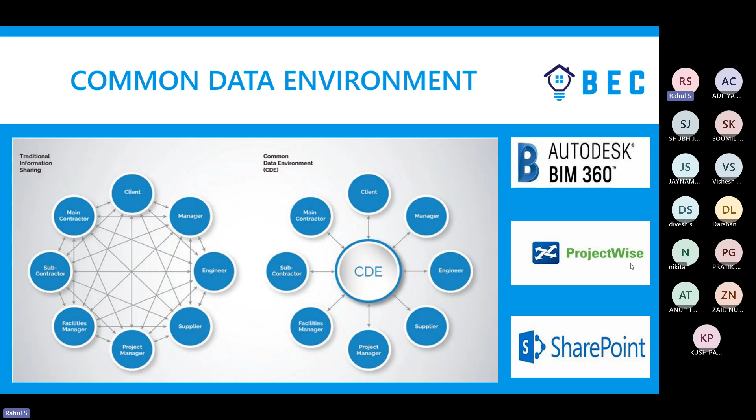Now coming to the next point, we have a concept in BIM called BIM dimensions. Now what exactly are BIM dimensions? Everybody knows or is well aware about 2D and 3D. 2D means we are dealing with only x and y axis, then we shift to 3D. So whatever things we create in 2D, if you want to visualize inside a 3D environment, the z-axis comes into the picture, and you can visualize any model, geometry, or object in 3D mode or 3D visualization.

But when we focus on BIM, or advanced technologies like BIM, we have certain additional dimensions to be visualized or monitored for a particular project, or for any particular object or product - how things will happen with respect to execution, cost, performance, everything. Related to this, we have 4D, 5D, 6D, 7D, and 8D. Till now in India we are majorly working up to 7D itself. 8D and 9D are still under review, not yet published for public use. Some US and British consultants have good experience and are doing R&D in this field, developing things with respect to 8D and 9D.

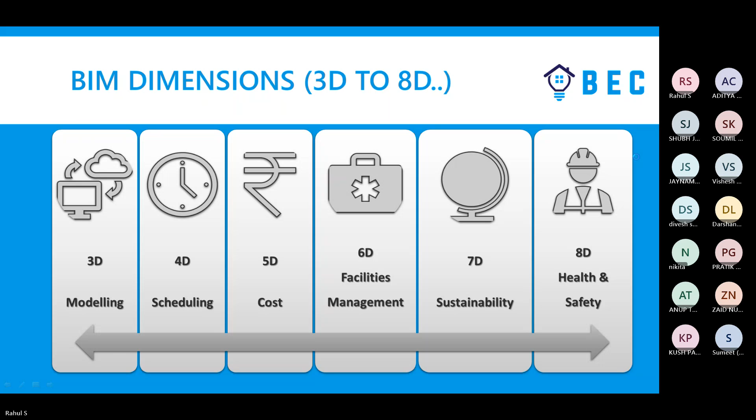Similarly we have facility management, then sustainability and health and safety management. Here we have this 3D shared information, a 3D rich model which will have all the services - architecture, structure, then MEPF. In MEPF also we have multiple things available, like plumbing part separate, electrical separate, sprinkler separate, and HVAC ducting separate.

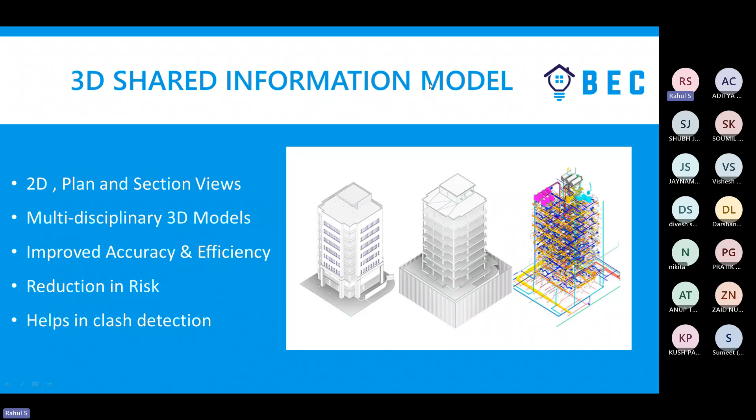Okay, now just a minute.

So what exactly is clash detection? While performing 4D simulations, we need to do clash detection as well, before the 4D simulations, on whatever model you have received. So last time I told you we have three particular vendors or suppliers - architecture is separate, structure is separate, MEPF is separate. When they all submit the model to the BIM consultant or BIM coordinator who is part of the project, his roles and responsibilities are to first QC the model, then review all the models and check whether the data has been created as per standard, and third, he needs to check the clashes.

So what exactly does clash mean, or what exactly is clash detection? Let's say the MEPF duct is clashing with any architecture element or any structural element while performing the planning activity. So those things basically come under clash detection, and we need to check whether your model is clash free or not.

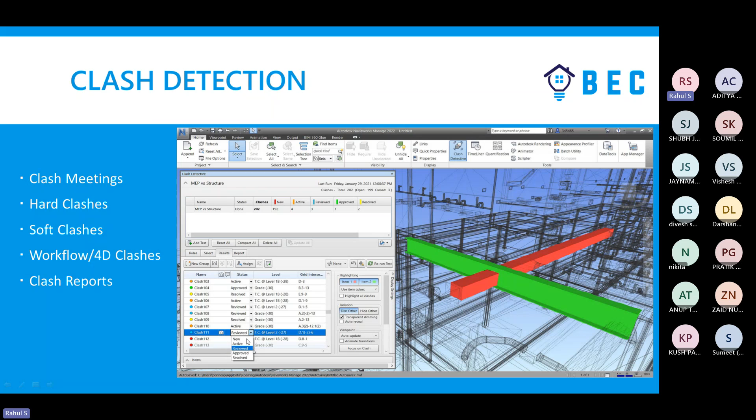So how are we checking those things? We have a small video, I'll just show you. Okay, I think it's not running. I'll just show you here.

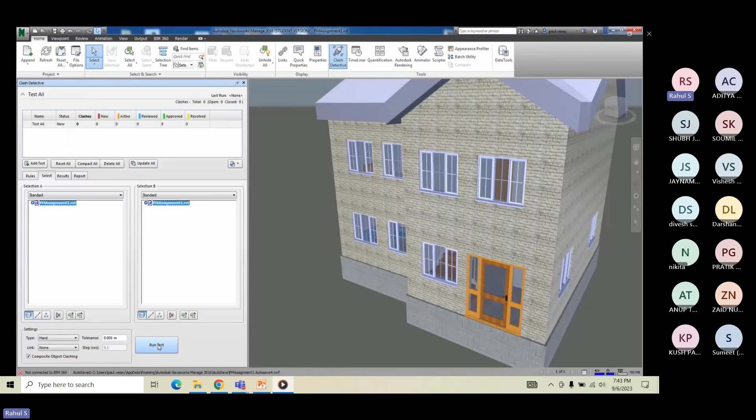So here, once you've imported the model, you need to select what versus what to run the collision check. Let's say I've selected the architecture model versus the MEPF model. You can see whenever you click on particular things, it directly shows some of the clashes. So here it has run the clash check with respect to architecture and structure elements - a few beams or things are clashing with the floor element, and it will be highlighted in red and green color.

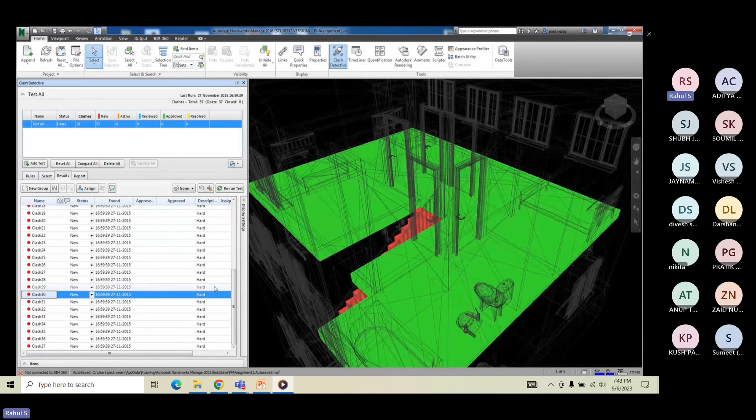So this is how you can generate the collision check, or the clash check, for the model. Once you find multiple clashes, the BIM coordinator or BIM consultant's responsibility is to conduct a coordination meeting and address those issues or collisions to the project team members - the management, the suppliers, those who actually work on this. In this meeting, he or she needs to give guidelines to the project team members or suppliers on or before the particular due date, so they update those things.

So at certain intervals, those coordination meetings will keep happening - maybe every 2 to 3 months - until your model is done and completely clash free. Then the model is approved for construction, or approved for GFC drawings, whatever drawings we issue from the BIM models. Only after that do we issue the GFC drawings.

So this is the complete process we need to understand - how exactly things work from 3D to 4D. First we work on the 3D model, then we go for clash detection. Once your clash-free model has been submitted, your next steps start, like understanding or estimating the costing part further.

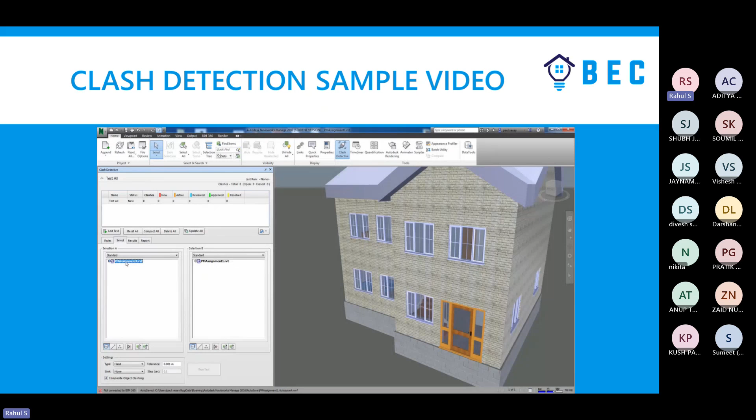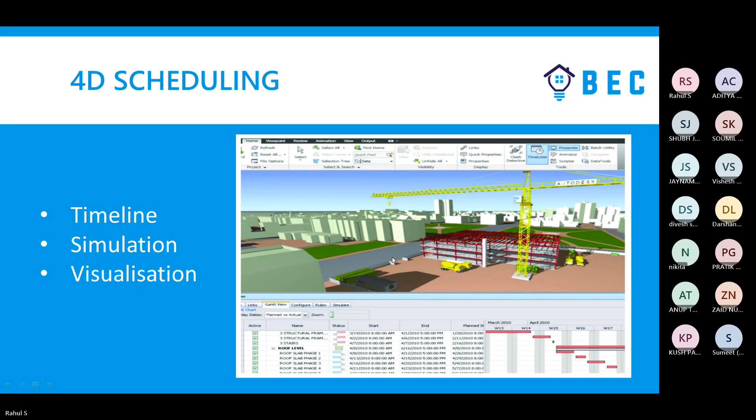So when we run this particular simulation video, it will run with respect to cost, material - everything in detail. I'll just show you that video as well, how it looks.

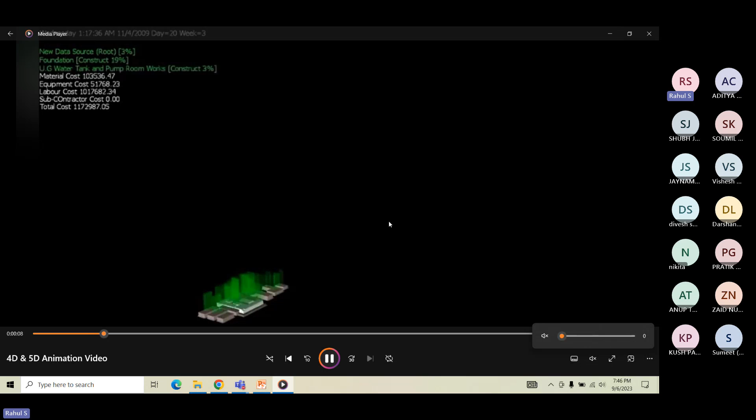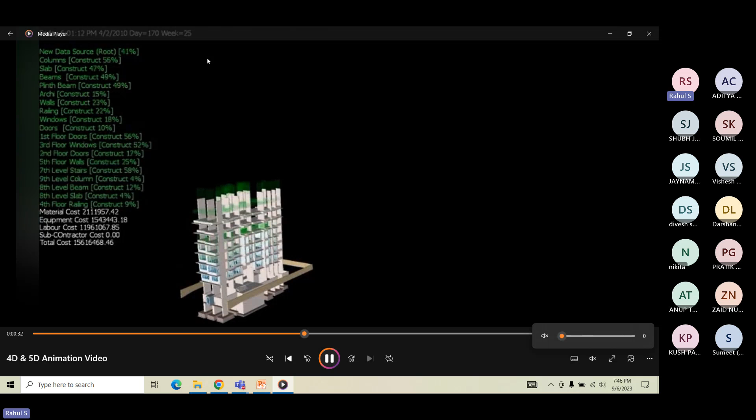So once you assign everything with respect to the date on the top side, you can see how much material cost I'm spending, how much equipment cost, how much labor cost, total cost, subcontractor cost. Only thing is you cannot see the day and time because of this - if you see on the top end, how much week, how many days - I'm not able to, is it visible, the top line?

Can you pause it so people can see?

Is it visible, Vishwesh? Yeah, it's visible on the top bar. Exactly. So here it will give you the date, current date, time, and how many days. So for executing this particular building up to this stage, it has taken 170 days, 25 weeks, and up to this how much cost they have spent.

You can see the floor wise as well. So for doors, this much cost has been spent. 10% of the doors have been constructed, and the cost has been spent for this material cost. You can see here.

If you want to segregate this cost, how much cost you spend for doors, walls, that is also possible. In that case, we generally call it BOQs. We are extracting that particular data from your Revit model, so that you will get it into Excel format, and you can link that data either in a simulation video, or you can prepare dashboards to showcase to your management, like this much cost I have spent for this many items or this many details.

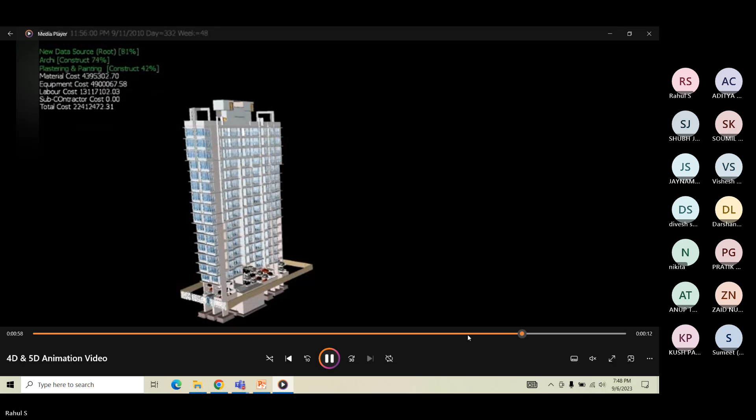Okay, and now coming to the 5D part, if you see, here you will get each and every item with respect to the cost, unit cost, total cost, everything.

So for cost also, we may have multiple softwares, or multiple things to do. Only the thing is the proper software and what exactly you are doing. Most of the people, they are creating the models inside Revit, but they are not using Navisworks. They may have multiple items similar to Navisworks according to their industry standard or their industry use.

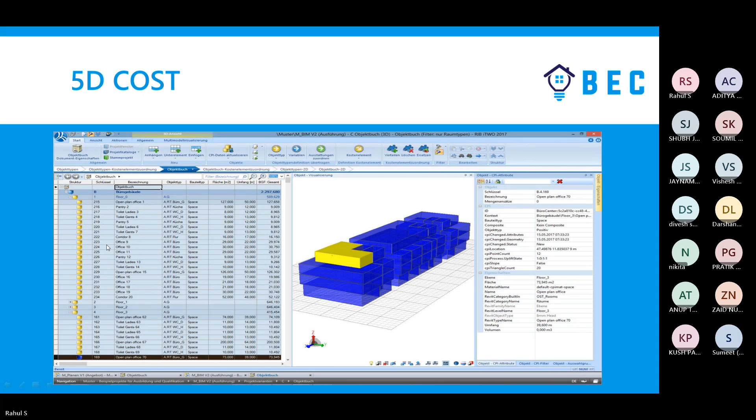Okay, now what exactly are the 6D and 7D parts? So once your model is prepared and ready, and almost your building is also constructed, if you want to analyze how your building will perform after construction. Now what exactly do we need to understand by building analysis?

It may be a daylight analysis. It may be your energy analysis. It may be your building performance with respect to situations, like how your building will perform in summer, how it will perform in winter or in the rainy season. So based on multiple parameters, this building analysis will be done inside Revit itself with respect to one add-in tool, and that is Revit Insight. If you search Revit Insight, it will give you the result of how they are performing the building analysis.

I'll give you one small example. Say I want to perform or understand the daylight analysis. Once my model is ready or once my construction is completed, then if I want to analyze with respect to my wall window ratio, how much energy saving I'm doing with respect to floor wise or with respect to the entire building.

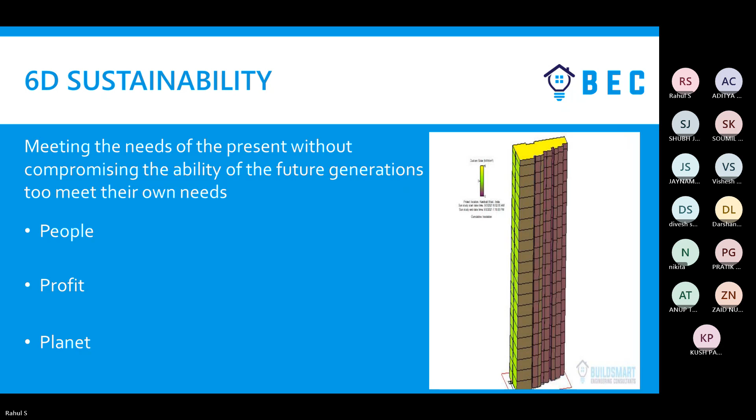So likewise, we need to understand the concept of sustainability and facility management. This is again important data we require for facility management. Now let me tell you why we need this data. When we are preparing the model, inside the model we are placing the assets.

Asset means the electrical devices, CCTV cameras, AHUs, all the electrical or mechanical equipment. When we purchase those mechanical equipments, we are not keeping records anywhere. Let's say I purchase 10 cameras from a company. He gives me 10 cameras, but I don't have anything properly documented. He just gives me the invoice and an Excel sheet with the serial numbers and some detail information. So in the traditional way, we usually keep this everything in the laptop. We install on site and check all those cameras are working fine on one of the CCTV screens or a big screen. That's it. We are not linking the data inside the model.

But when it comes to facility management, or the 7D part, we are generating all the data inside the model itself. For that data we specifically call it COBie data. What exactly is COBie? Construction Operation Building Information Exchange. So whatever building you're constructing, to operate that building you basically need the data.

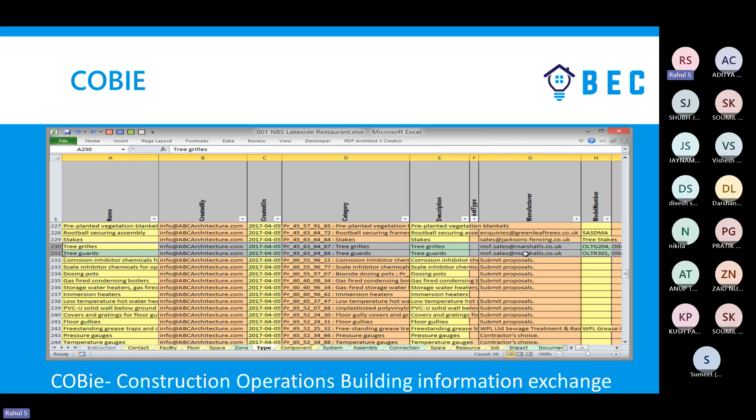So we already discussed facility management and in which domains it may work. It's not related only to our industry, it may be used for multiple industries, for everything, not just buildings. If you see landscaping, in gardening also you can provide some facility management or automation to provide water for the trees. That is also possible.

Okay, and this is about health and safety. So whatever the things so far, BS standard has released with respect to 8D is basically they are developing some standard to maintain the safety policies, or to maintain that particular culture on site.

So what are the provisions that can be taken care of? With respect to safety points, the particular safety engineer needs to fill the daily logs inside the cloud management to submit his or her report on daily basis. Right now, the person comes on site, fills something into Excel, then second day sends that Excel, and no photos get captured. So if you have any CDE platform, you can actually directly capture the photo, and automatically it will get uploaded with respect to the building or the particular person.

So those kinds of advancements will be available inside this CDE, and all the dimensions we discussed so far will be linked to the cloud model.

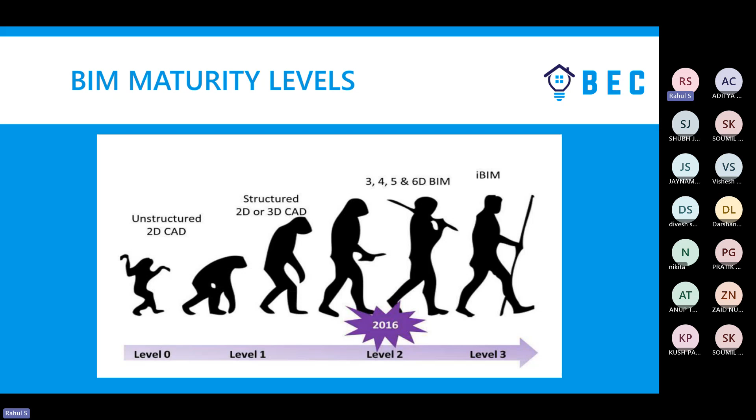And with respect to this, if you see the levels here - now if you see, we compared level with respect to the dimensions, and on this screen with respect to collaboration. In CAD, we are not collaborating with anyone, only one person is individually working. Once he has completed the work here, he is directly handing over the work to the next person. But when we are doing this 3D part or the 4D, 5D part, this is completely full collaboration - level 2 if you see.

Now how exactly is this full collaboration? Whatever the person is working on, that entire data is linked to the cloud model, and all the people or project participants are also linked to the cloud model. So whatever he is working on is directly reflected onto the cloud - no need to send the data to an individual person. So this is complete full collaboration.

And when we see this completely advanced BIM into the 6D and 7D and further on, this is full integration. Now why does this integration term come into the picture? We are integrating something with respect to our BIM model - building performance analysis, COBie data, facility management, BMS, AI, digital twin. This is nothing but your complete full integration.

So we are integrating something with respect to the existing structure. You just keep in mind maturity level with respect to the dimensions, how it works, and with respect to the integration, how it works.

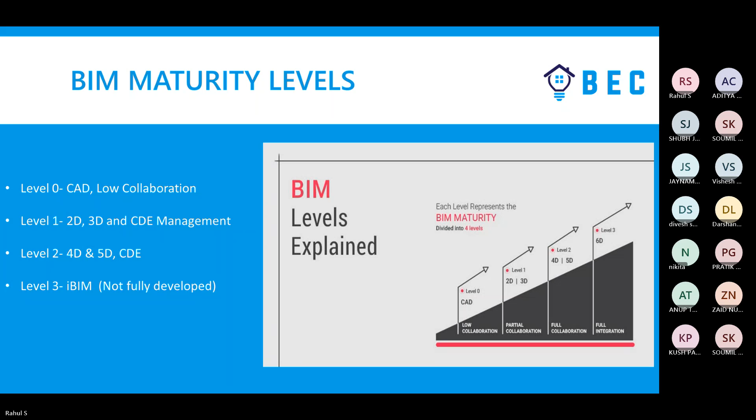Continue, Rahul. Anybody in the meeting? Students? Everybody's sleeping. Yes ma'am. Janmashtami - charge up, students. Chalo, yes Rahul ma'am, we are here, continue, okay no problem. So when we'll meet first time, then people might be comfortable to speak, I guess.

Okay, so now next, what is LOD? So we discussed so far maturity levels and BIM dimensions. The third point I told you, that is LOD. Now, what is BIM LOD?

Okay, so we specifically have 5 types of LODs, like level of development. That is LOD 100, 200, 300. There is another one, 350, 400, and 500.

So whenever we are seeing this, let's say for example, I will give a small example. If you want to develop one project, the owner or stakeholder first goes to the architect. Then the architect creates a basic conceptual planning or initial sketch, just taking an understanding of what exactly needs to be developed. So during this stage, the conceptualization or initial planning, or initialization, generally we call this LOD 100 model.

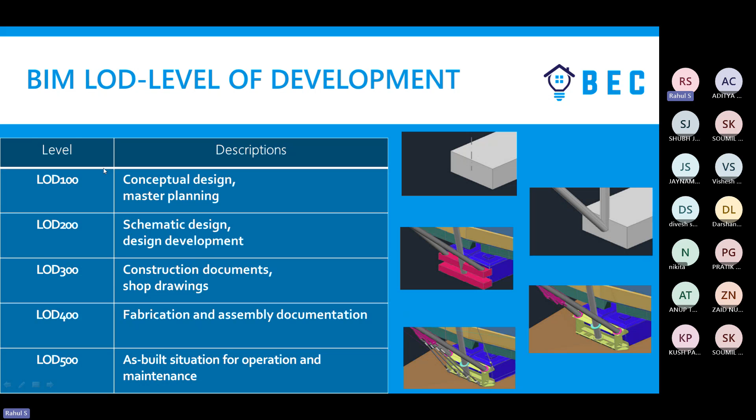I'm telling this example with respect to our construction industry scenario. But if you see on your right hand side, initially we have only one small box - this is your LOD 100 model, because it doesn't contain anything, just a small box. Then we have LOD 200. So when we are increasing the LOD, the parameters associated with the object will get increased.

So this is just a scenario, but when you see the data - when you are upgrading or developing the LODs higher, multiple parameters come into the picture. Right now when you see LOD 100, you don't have data, only the rough sketch - you don't know the height, width, or depth, nothing. But when you go to LOD 200, you actually able to define few parameters, at least length, width, height. Again if you go in detail, you might define the curvature, the surface, the radius for the curve, those things.

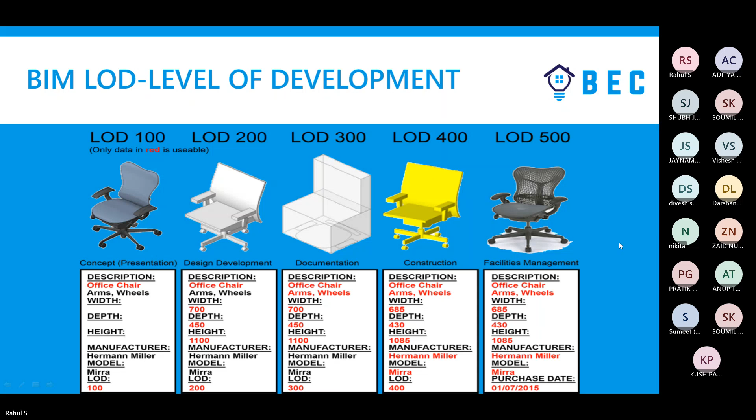Okay, next we have the BIM standard. Earlier, before 2018, this was called PAS 1192. After 2018, it was renamed ISO 19650, and it has certain parts: part 1, part 2, part 3, part 4, and part 5.

So why do these standards come into the picture? That's the first question. Because if you don't have the standard, before 2018, people were supposed to develop BIM models, but it was observed that year on year we need specifically defined things, like we have building standards, PWD standards, and other kinds of standards. Even in your curriculum, you learn some standards with respect to design management. So everywhere we need to maintain standards to make the particular model or building globally recognized, or globally accepted for everyone.

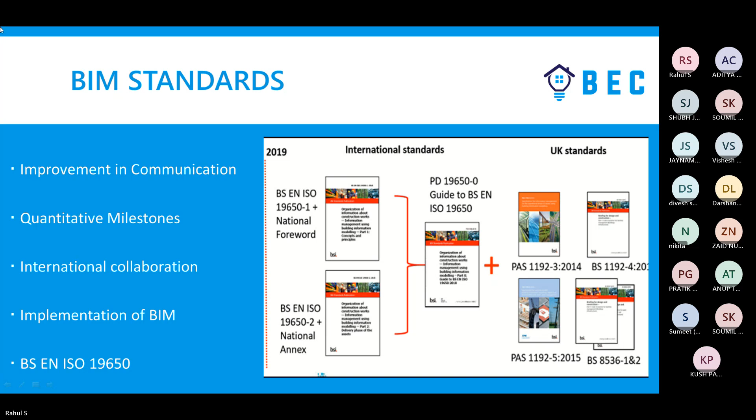So what exactly do you need for this particular role? With respect to your degree, you may need to be well versed with software like AutoCAD, Revit, Navisworks, and any of the cloud platforms.

Okay, so these are the prerequisites to enter into the BIM industry. And with respect to your experience, then your skill set, your position or designation will get upgraded.

With respect to the modeler, after 2 or 3 years of experience, you may get promoted as a BIM coordinator, only for one discipline, like architecture, structure, or MEPF. Again, after 5 or 6 years of experience, you may get promoted as a BIM lead coordinator, responsible for coordinating with stakeholders and suppliers, and managing the complete team of modelers. Above that we may have a BIM manager, who is the whole and sole person driving the entire team and defining the goals and BIM scope of work.

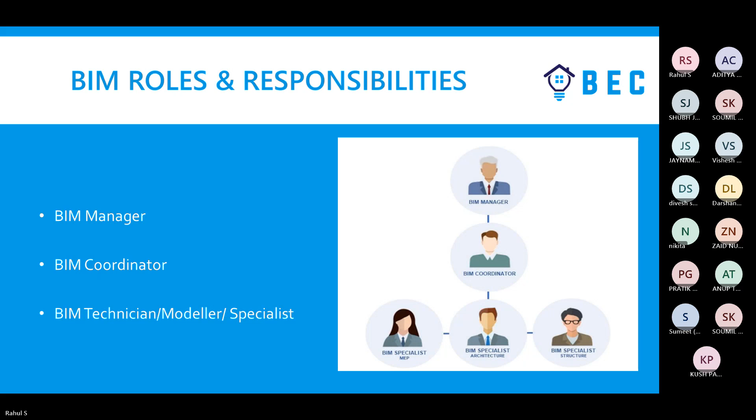With respect to career growth and salary, these are the average salaries, not strict within the industry. If you go to the IT industry with respect to your BIM domain, you may get a good salary, but these are the minimum ranges you may find entering the BIM industry. If you're starting as a BIM modeler for any one discipline, your starting salary will be minimum 25,000 per month.

That's the minimum again, which will be an average one. If you are an expert in modeling and expert in the MEP domain, your minimum salary will be around 30 to 40,000, depending on the trade and your skill set, because in Revit we don't have just a single domain.

It's not that if you know architecture you will directly get a job - there are multiple domains: architecture, structure, MEPF, and also family creation. If a person is expert in family creation, they can directly get a good job in one of the product-based companies - companies developing their own products like CCTV cameras.

They need to develop cameras inside Revit itself, multiple types of cameras. So we need to create a family for a particular camera, or for a door, or for any element - n number of elements. Those companies are actively recruiting people who know family creation in their domain. I'm not saying only for HVAC, it may be for architecture or structure industry as well. So these are your skill sets.

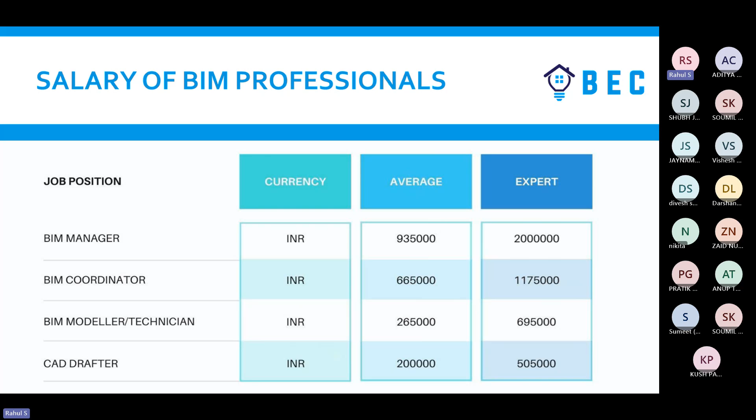When you're learning Revit, try to find your area of expertise. Maybe a person wants to visualize things better, so their area of expertise will be architecture. If anyone is interested in developing things in MEPF, they can say they'll develop good families and learn more about family creation. It's not restricted to just one industry - once you enter BIM, you don't need to learn everything. If you have one area of expertise in a good sense, you will easily get a well-paid job, even in MNC companies.